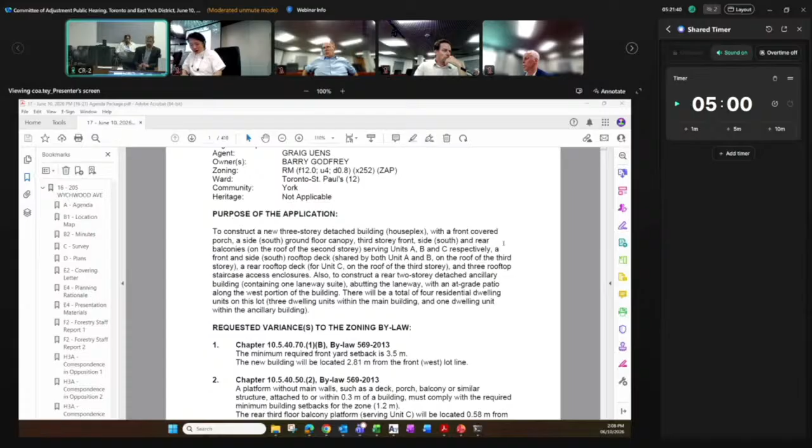Containing 1 laneway suite, abutting the laneway, with an at-grade patio along the west portion of the building. This will be a total of 4 residential dwelling units on this lot, 3 in the main building and 1 in the ancillary building.

We have received comment from Urban Forestry, and also we have received a list of oppositions.

203 and 207 Wychwood Avenue, and also 58, 62 Kenwood, and 200 Wychwood, and 201, 216 from Wychwood. And that's one without an address, Chan Cohen.

And we're ready for the agent, and I believe... Yes, Madam Chair, we have the agent here in person, and we have 5 speakers in opposition, in person as well as online. Okay, so you do have still 5 people who would like to speak to this application.

So please give us your name and address, and when you're ready, we'll get a presentation from you.

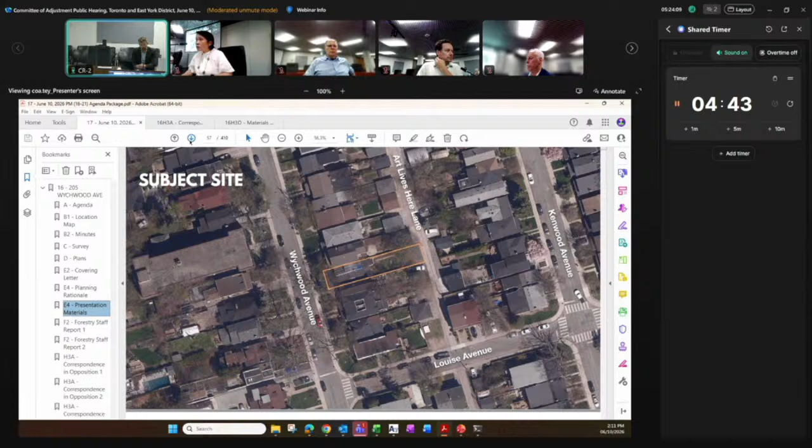Next slide, please. There's an existing 2-story, or 1.5 story, building on the site, as you can see there, the white building. The context includes a variety of residential buildings, 2 and 3 stories in height, as well as a 4-story apartment immediately across the street. There's a mix of modern and older styles, front and rear balconies at various levels, and other characteristics that reflect elements of our proposal.

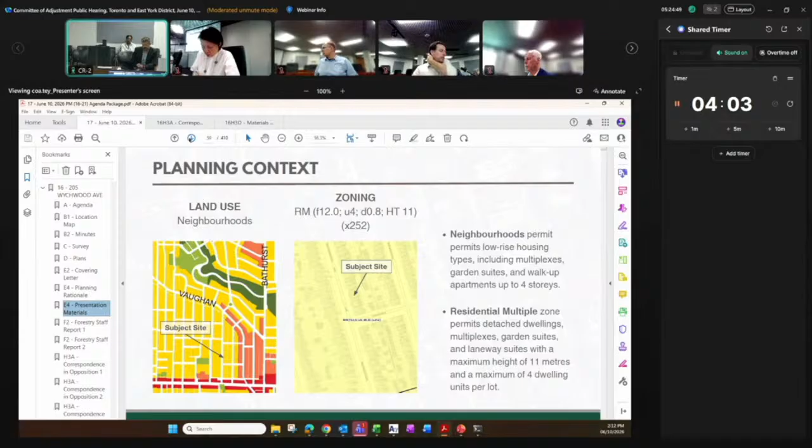Next slide, please. The site is designated neighborhoods, it's zoned RM. The planning framework permits a variety of low-rise housing forms, including multiplexes, low-rise apartments, as well as garden and laneway suites. Next slide, please. The proposal comprises a 3-story multiplex and a 2-story laneway suite.

As I mentioned, there are 4 dwelling units in total on the site, and 0 parking spaces proposed in accordance with the zoning requirements.

The one interesting thing I'll note about this proposal, as I noted when we deferred back in April, is that this is the result of 3 separate families getting together to purchase the property and develop a triplex for their 3 daughters, one of whom is here today. The daughters are friends, and they share a desire to live in this neighborhood, which I understand is a desirable neighborhood in the city. I think it's very much in the spirit of the intent of the EHON policy changes.

The application was deferred previously based on comments from neighboring properties, as well as for us to clarify one of the encroachment variances. We took that time since the deferral to have a virtual community meeting on April 23rd. About 10 residents were in attendance, mostly surrounding neighbors. There were questions and concerns about trees, setbacks, building height, among other things. We talked about the process as well.

It was a good meeting, and it helped inform a number of key changes we made, along with information from the letters we received. One of them, shown here, is that we've revised the south side yard setback from 0.06 meters to 1.2 meters at the ground floor, which is the compliant dimension, and the back portion highlighted there is 0.45 meters for floors 2 and 3.

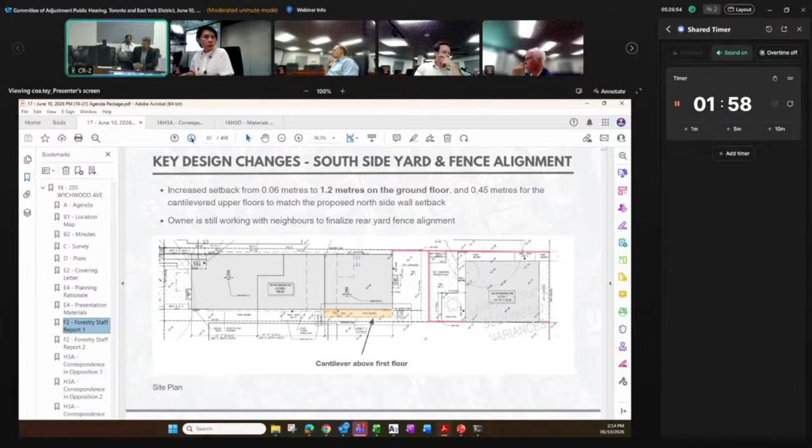We've reduced deck encroachments, one of them entirely. On the south, you can see in green that was reduced to comply with the bylaw, and the other one, to the extent of the side yard projection, we have screening shown on all balconies as well.

The roof deck areas have been decreased. They've all been set back from the main walls to prevent overlook and privacy issues. We added access from the middle unit to the roof deck, partially to offset the reduced balcony on the lower level.

These changes have removed 2 of the variances. We note that the area has been split, as you see here.

We've also reduced the massing of the staircases to as great a degree as possible. The left shows the previous design, the right shows how we've reduced them as small as possible while complying with the building code.

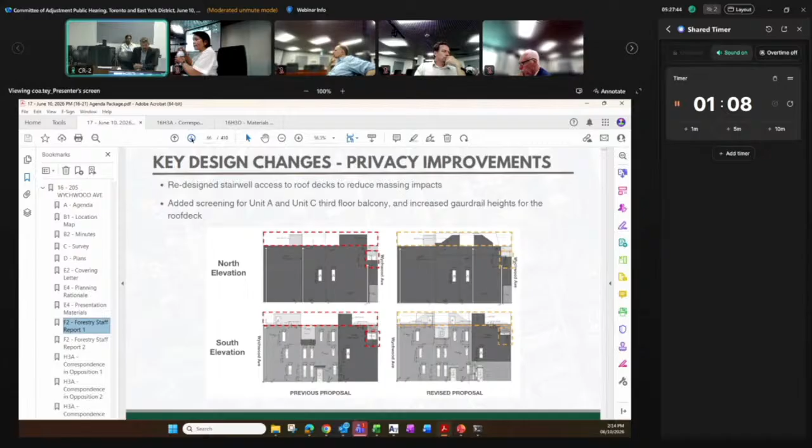Our front and side setback variances are shown next. These are the list of variances, including ones that have been removed.

The front setback is pulled back from the current front of the house. The north side setback is also greater than what currently exists. Though the building is taller than what currently exists, the height is permitted by the bylaw, and there are no primary windows facing north. The south setback broadly complies with the 1.2 meter requirement; only a portion of the second and third floors at the back of the site is set back 0.45 meters.

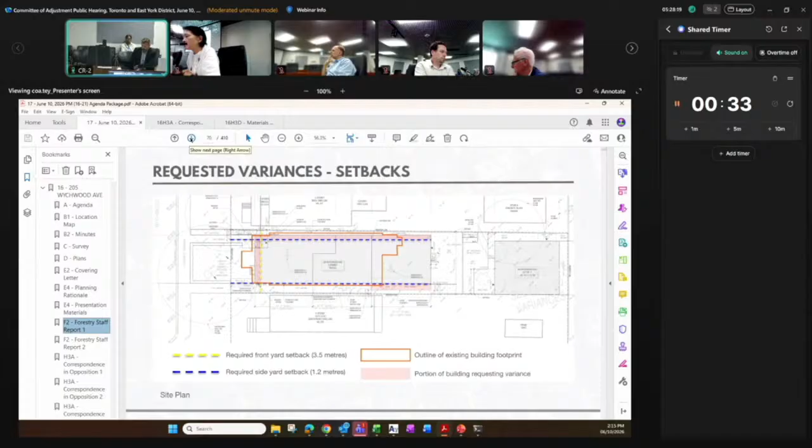The reason this part of the building is where it is, is to maximize the number of 2- and 3-bedroom suites in the unit. It's very much an end-user type building, consistent with multiplex policy 826 sub B2, which intends larger family-size units. We have no rear setback, laneway, separation distance, landscaping, or length variances associated with the building. No trees are being removed or injured as a result of either building. I'll note that the side yard setbacks align with context in accordance with the multiplex policies.

If I could ask for 1 minute to finish, I'm sorry—maybe half a minute.

Half a minute works. We've reduced the first and third floor balconies as shown on this slide, and we're showing screening on those balconies as well. The green areas are what the bylaw allows, the red areas are what projects.

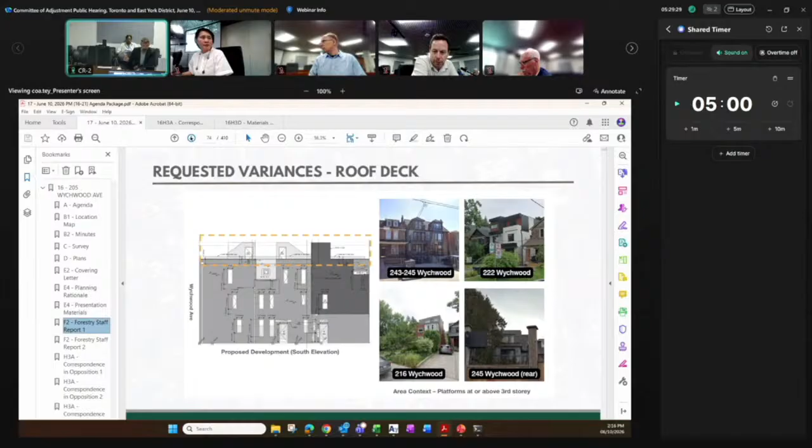Next slide, previous slide - you can see the roof areas have been reduced, and there's a characteristic of upper roof decks, including a 4-story building just to the south. You see at the top or bottom left there, which has a roof deck and a 4th story to access those.

In summary, the proposal before you reflects community and city staff input, which resulted in revisions that reduced and removed variances, improving the project so it fits better within context, especially regarding the front side yard setbacks, height, and landscaping. City staff do not object to the proposal. In my view, the changes materially address neighborhood concerns and meet the 4 tests.

Thank you. Is it, so we hold our questions to him? Can I ask a few questions of clarification? Just clarification, okay. All right, so let's go, yeah. So just—

I was just looking at the plans. It looks like the total height, including the staircases to the roof, is something like 12.49 meters. Normally 11 meters, I think you said, was the maximum. I was just wondering why that didn't need a variance. The stair enclosures are permitted projections under the bylaw. So the roof height, the height of the 3rd story complies, and the railings for the roof decks, which are all set back, and the stair accesses are permitted projections.

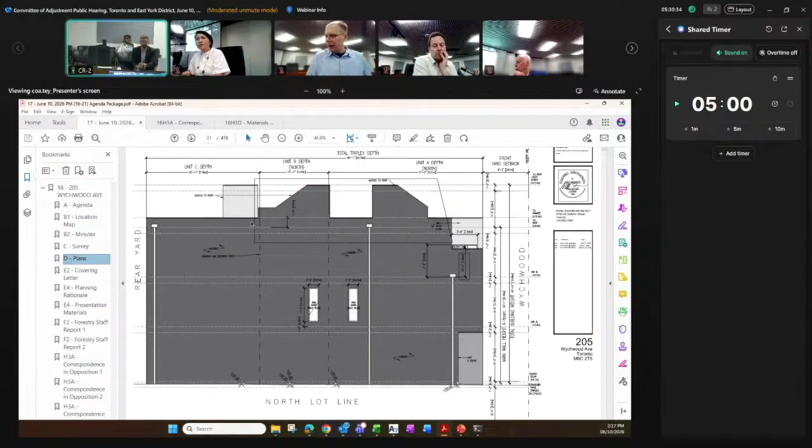Okay, great, thank you. And it looked like the length was 20.75 meters, which is also more than I think usually is allowed for multiplexes. I was just wondering if you could speak to that. That's correct, and that was flagged when we originally submitted back in March or February. This zone category does not have a length requirement for a multiplex building. Okay, great, thank you.

That's very helpful. One last thing - my understanding is the laneway suite is as of right, even though it goes right to the southern property line? Yes, we have a zoning review for the laneway suite. It's as of right. Laneway suites have a 0 side yard setback. Garden suites have a side setback, but laneway suites do not. That's correct. I think that's all helpful to clarify before we go into the details.

Thank you, that's very good, because I was wondering. I just want to mention that the presentation is really, really good. The written one - on page 2 of the cover letter, there's actually a chart showing the difference, the improvement since the last hearing. I find that very, very useful, because I was asking a whole bunch of questions before I discovered that. So if we want to refer to those changes, they're quite useful.

Any other clarification? Because we still have some questions, but I'm sure later we can ask. So we will listen to the oppositions now, and we'll bring you back later.

Madam Chair, now we'll hear from the owner of 203 Wychwood Avenue here in person. Good afternoon, committee members and attendees. I'm Melinda Benjamin, from 203 Wychwood Avenue. Please accept my gratitude for the opportunity to express my objection to the proposal as it stands.

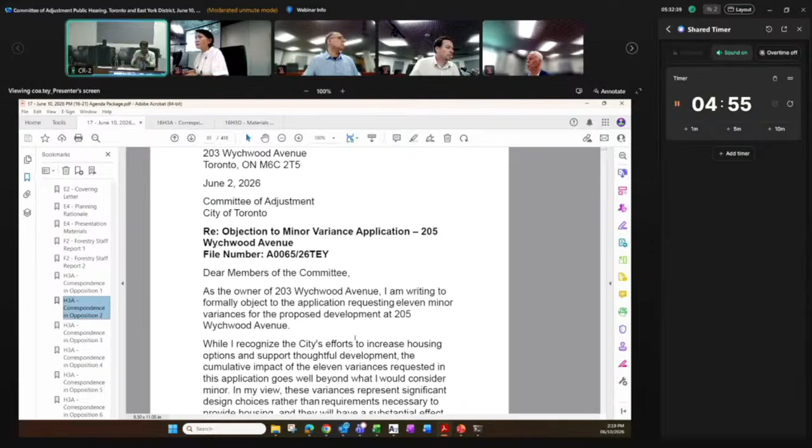Like many homeowners, my home is my biggest investment. I started from the bottom and now I'm here. I object to having a structure 17 inches from my property line, variance 9, towering over with a view into my third bedroom skylight, with windows emitting light at night through that skylight. The bylaw requires 1.2 meters.

I object to the idea that we should compare how close houses in the neighborhood are and how they were built 20, 30, 50 plus years ago, before this proposal, to justify approval of not complying to current bylaw standards. I urge the committee to hold the new building to comply with all the applicable bylaws.

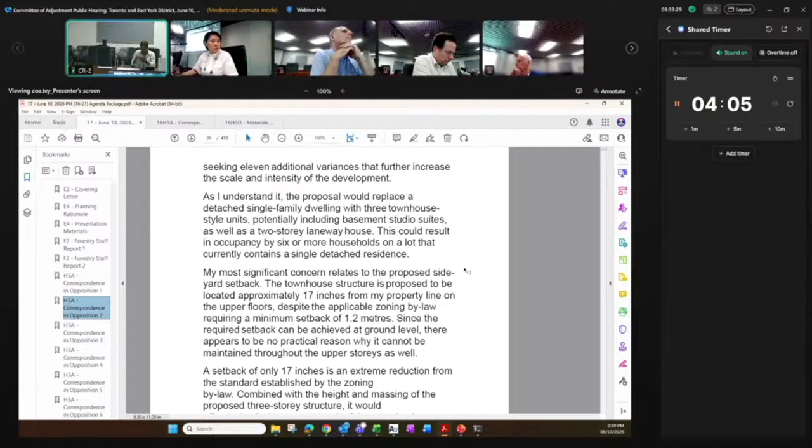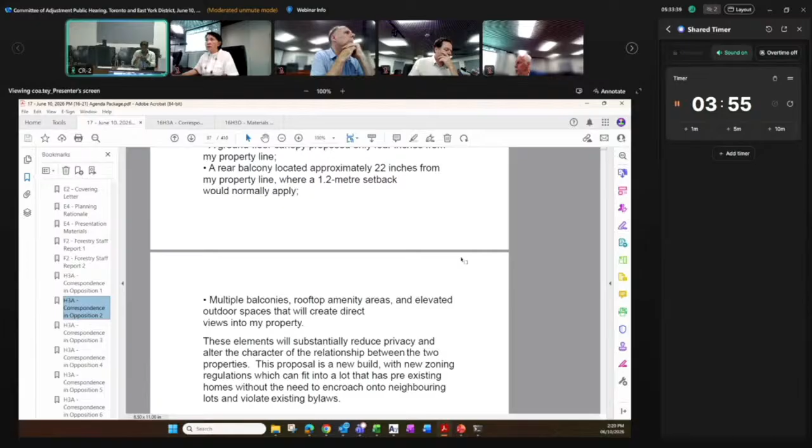My lot is 17 feet wide. The width of the proposed site is 25 feet, 8 feet wider than my lot. 8 feet is just short of half of my lot. These minor variances are not minor to me, when inches will cost me to spend more in getting workers to work in tighter, smaller spaces, not having canopies and balconies to work around.

A canopy will be located 4 inches from the lot line. The bylaw requires 1.14 meters, variance 7. This proposal is for a new building, replacing a pre-existing non-conforming house, and cannot be compared to those setbacks from 100 years ago.

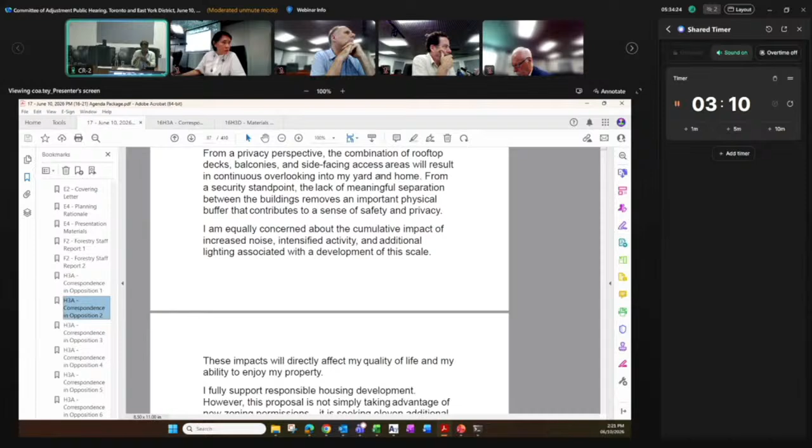A 1.2 meter setback for a new build is possible. It's obtainable on a 25-foot lot. I object to having a laneway house built right on my property line with no setback.

Dialogue is essential. However, I object to Barry Godfrey coming to my house unannounced at night on May 4th, stating that my house A is on his property line, and B, that he could build a fence between the houses, cutting off access to the north side.

On December 9th, there was a hose attached to 205 Wychwood that burst. At 10 p.m., I had to go out there and shut off the water because I had access to the north side. I object to any design that causes unnecessary encroachment, deprives me of privacy, a sense of security, and enjoyment of my home. These choices are not necessary to build affordable housing on a 25-foot lot.

I know because my husband and I built an affordable house on a 17-foot lot. As a widow of 2 years and a retiree on a fixed income, I object to any proposal that would make the cost of repairing my home higher.

In particular, I'm concerned about the paved walkway between the buildings. The water is going to flow right against my house. I object that a picture of my vehicle on my private lot is used in a presentation that's posted online. I know that's not illegal, but it would have been very respectful to ask me if a picture of a vehicle on my lot would be part of a presentation.

As many of us know, home ownership is difficult, and keeping it is proving to be just as difficult. We're learning now how the new zoning regulations may impact our homes. The Ben Mulroney Show had a very informative segment about 63 Station Road. I would like my family to have the ability to adapt to the new zoning regulations without impediments. Please reject this proposal as it is.

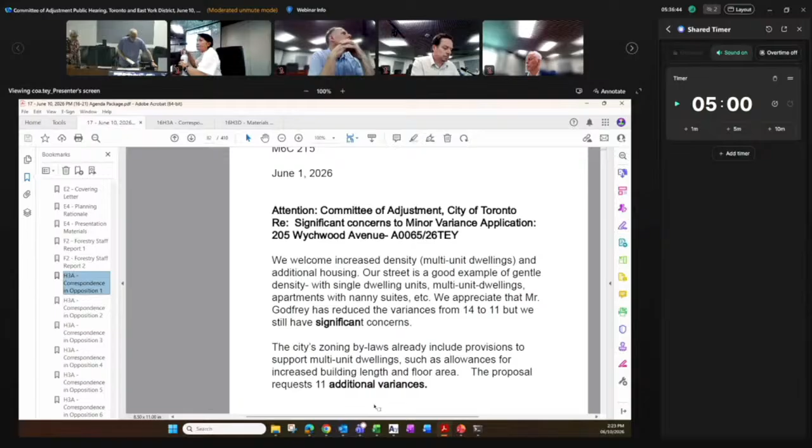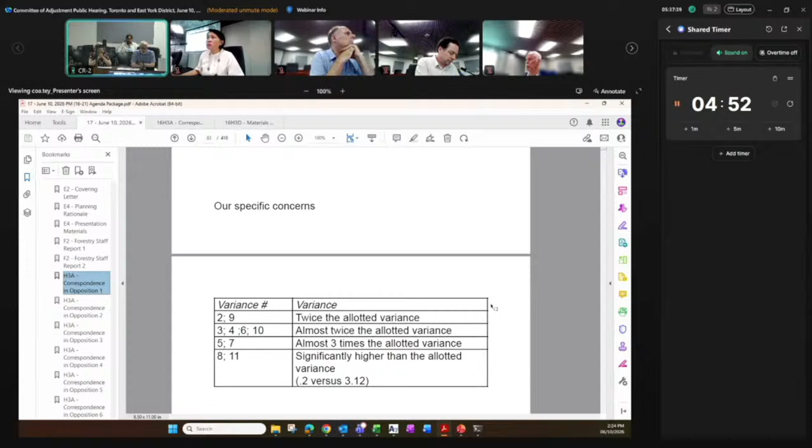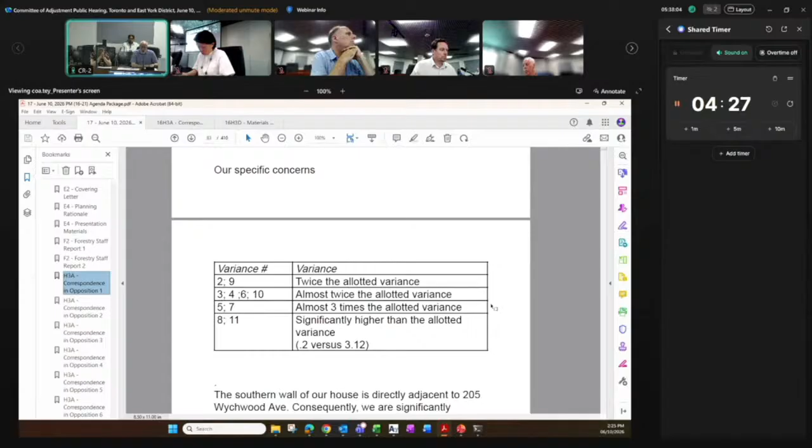That's sure, yeah. So I'm Alan Silverman, my wife Yvette Mathias. We're at 207 Wychwood. We are directly adjacent on the north side to the proposed development, so obviously this concerns us greatly. I want to begin by saying that we support 100% what has just been expressed by Ms. Benjamin at 203 Wychwood. We are not opposed to development, and we appreciate gentle density, which is the common situation on Wychwood at the present time. And even though the number of variances has been reduced from 14 to 11, we still have significant concerns.

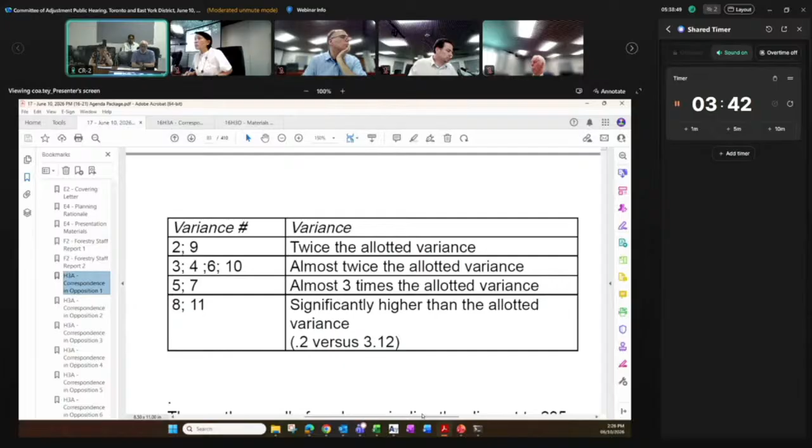So let me begin by saying why we consider it to be significant. On variance number 2 and 9, this is twice what is allowed by the bylaw. In 3, 4, 6, and 10, almost twice what is allowed by the bylaw. In numbers 5 and 7, almost 3 times what is allowed by the bylaw. And numbers 8 and 11, significantly higher than allotted by the bylaw, from 0.2 to 3.12. So this is significant, not minor.

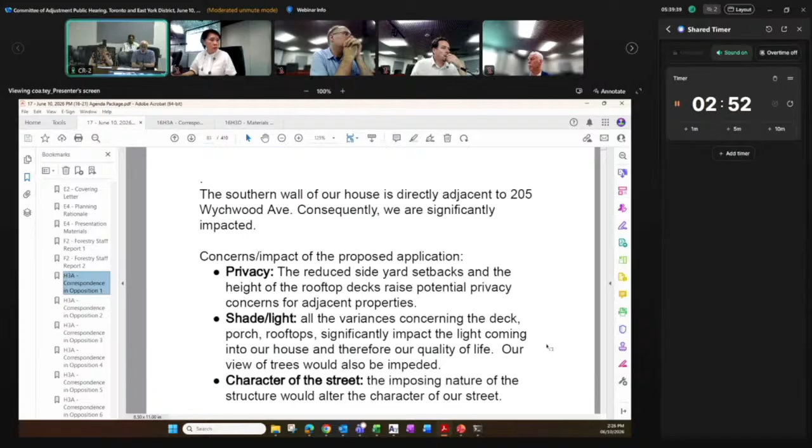To summarize what this means for us: first, because it is much bigger, larger, higher than, and closer to us than what is required, that raises the issue of privacy. Secondly, for the same reasons, it has a huge impact on the light in our building. We now have wonderful views, both east and south, and this will be severely affected by these proposed changes. And finally, the character of the street. I think Ms. Benjamin has clearly pointed out that this is uncharacteristic of the street.

I just wanted to comment on something that was said by the proponent at the beginning. We welcome family members of the owners, and we are very friendly neighbors, but that issue is not relevant to the discussion at hand. They refer to key changes that they have made from 14 to 11. I think I have clearly pointed out these are not key changes, they are minor changes, but the overall impact is significant and major.

Secondly, there was reference that no trees would be injured. Well, right now, it would be impossible to build the 2-story laneway house without significantly cutting down several of the major branches of this tree. So therefore, dear committee members, thank you for listening, and we are in opposition to this proposal.

Okay, 30 seconds. Yeah, you still have some time, 1.5, yeah.

I just wanted to add, we have windows facing the south, double windows, and double windows facing the east. Right now, we get tremendous light coming through those windows, and we get a view of trees. With the extension in the back and exceeding the variance, we will be looking at a building instead of the trees. And our garden is something we take great pride in. Instead of being able to see other gardens, it'll be impacted by having a big building in the back beyond what is allowed in the bylaws. So I just wanted to add, it has a very direct impact.

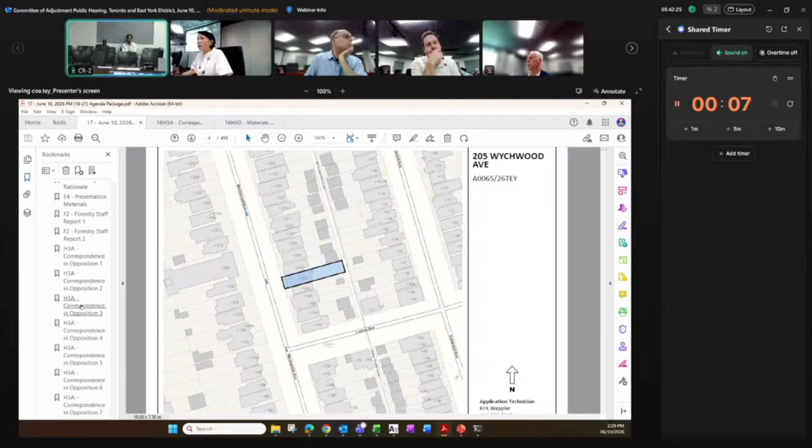Hi, everyone. My name is Chen Cohen. I live at 196 Wychwood Avenue, directly across the street from the 205 Wychwood development. And today I'm speaking in opposition to this minor variance application. Firstly, I want to apologize to the members of the committee for not submitting a formal letter. Can you hear me? Yes, sorry, I just want to make sure the clock starts. Okay, perfect. So firstly, I want to apologize for not submitting a letter in advance of today. I was traveling for work and unfortunately missed the deadline.

By way of context, I'm a partner at a prominent architecture and design practice. And although I'm fairly new to this street and neighborhood, I have taken the time over the past several weeks to carefully review the application materials, including the latest planning rationale submitted on May 29. In speaking with neighbors about this application, it became very clear to me that many people are concerned and do not necessarily have the background or skill set to read architectural drawings to fully understand the scale of what is being proposed.

That's why I submitted, if you could go to the late material submission, a sketch simply showing the elevational change between the neighbors at 205 and 203, showing the relative change between this development. The comparison is important, even with the roof access areas pushed back from the front, and even with the sloped roof line that appears intended to reduce the perceived height. The proposed building remains significantly taller than its immediate context, as shown in the sketch. Compared to 203 Wychwood, the proposed development represents approximately a 47% increase in height. And in my view, that's not minor. It clearly illustrates how oversized this proposal is for the site and for this part of Wychwood.

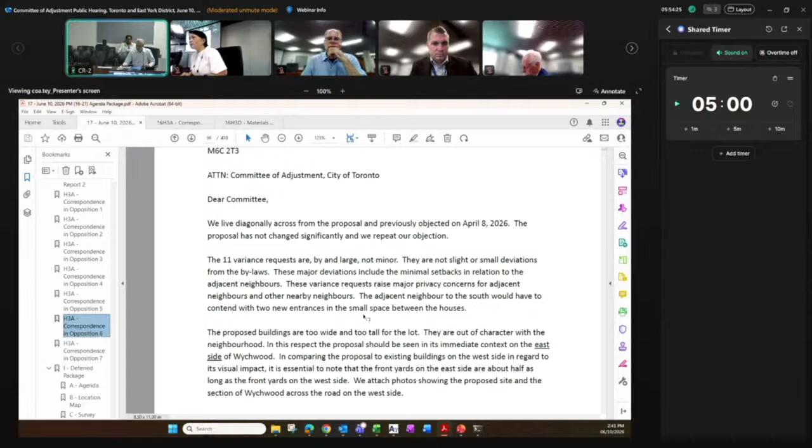Hi, welcome, thank you. First, can you put up the location map on the screen? Oh good, thanks. Okay, my name is David Lampert, and Mimi Beck and I live at 200 Wychwood, and I'm speaking on behalf of both of us. Our house is diagonally across from the property that the application is being made for, diagonally across from 205.

We believe the house is simply too big for the space allotted for it. You've heard the other speakers who are objecting, and we support everything they're saying. Eleven variances sounds like a lot of variances to us. We haven't been before this committee before, we don't know exactly how it operates, we're new to this. But when we hear that the applicants are requesting 11 variances, I think that's a strong signal that this is a very complex project.

When we look at it in detail, at the setbacks in various ways—the front, the side, the laneway house, the roof decks, the balconies, the canopies—it pushes out in every direction. That's why the applicants are requesting so many variances, and I think that's a signal that it is too big, too complicated, that it pushes out too far. What I wanted to put on the screen, the location map, is to ask the committee to focus.

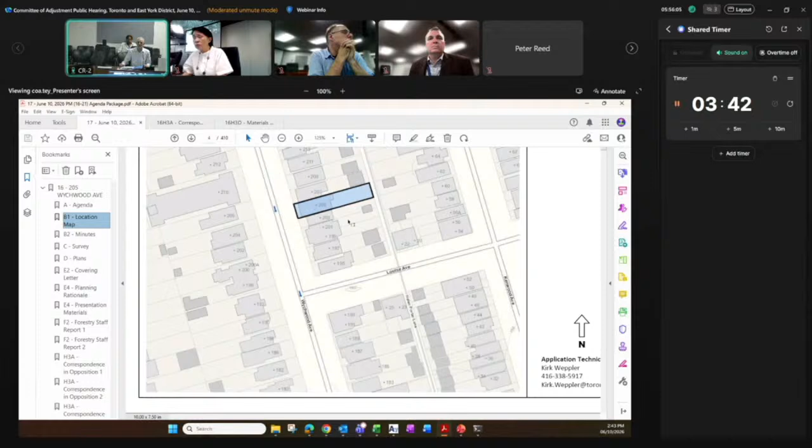The applicants have talked about the context, and other people have too. But a key point here is that the application should be seen in the very specific context of where the house is going to be located, which is on the east side of Wychwood. There's a fundamental difference between the east side and the west side of that block. On the west side, as you'll see from the location map, the front setbacks are substantially larger, roughly twice as large as the setbacks on the east side. And as I think Chen Cohn pointed out, on the west side you do have driveways.

She's talked about distinguishing this from 216 Wychwood, but I would say it's important to note there's a lot more space on the west side than the east side. Not just the length of the front setbacks and front yards, but also the number of driveways all the way up the block on the west side. The east side houses are much more tightly compressed and there are no driveways. So it seems like this is a large house being wedged into a small space.

Even without any variances, it would feel and look like a large house. But with all the variances, or any number of the 11, it's going to be that much more intrusive. What it does is crowd the adjacent neighbors. It wants more amenities for the people who will live there, but at the expense of the adjacent neighbors. We simply feel that's just not right and not appropriate.

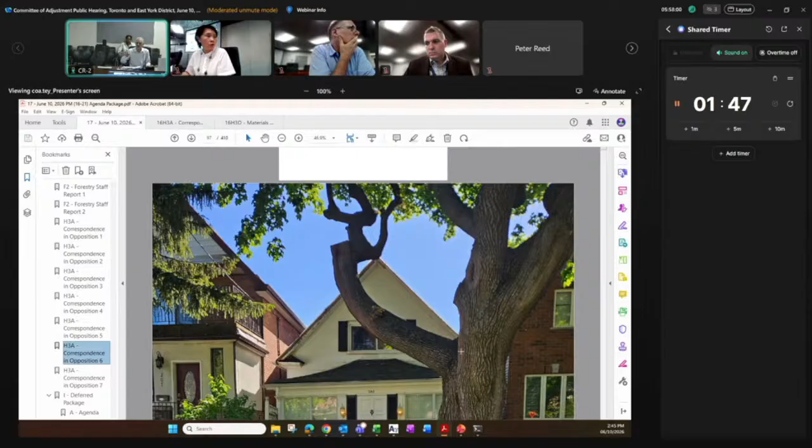Again, repeating what Chen Cohn said about it not being appropriate to compare this house and the narrow spaces on the west side houses with the narrow space this house would create between it and its neighbors. Those houses, many on the west side and even on the street, were built before the bylaw was in effect. We feel very strongly that the bylaw has to be taken seriously. Of course, it is your job, that's why you're here, to allow variances which are minor, but overall to give the bylaw the respect it deserves.

Just to bring out one example, one of the panel members pointed out there's a new provincial regulation that says instead of 1.2 being the minimum required, it's 1.05. But for the side setbacks on either side, especially the north side, it's for the whole house; on the south side, it's for the top two floors. So instead of 1.05 meters, it would be 0.45 meters. So even with the new requirement, that's 50% less than what's required under the bylaw, and it leaves the adjoining neighbors with very little space.

As others have mentioned, doing maintenance is a concern. We live in one of the houses featured in the applicants' presentation, and we have a narrow space and an older house, but it's difficult to do maintenance with such a narrow setback. So I'm asking or urging the committee, why create such a problem that the bylaw was meant to remedy? That's why the bylaw requires the setbacks, to have respect and consideration for the neighbors, and this application would undercut that essentially completely. That's why we oppose it.

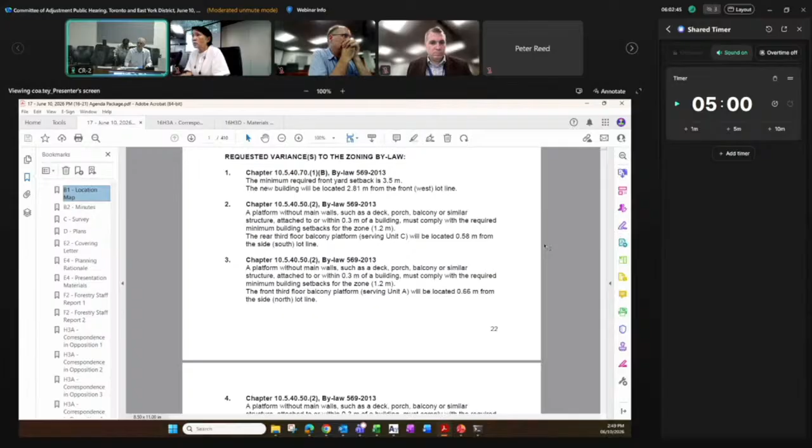I wish I had more time to study it and answer. I can tell you about the process - you do this all the time, right? But for us as outsiders, to pick our way through each of these variances and say what does this one mean, what does that one mean - it could be done a lot more clearly and simply, but you probably don't want to hear that from me since you hear it from a lot of other people often. So I'll leave today regretting I didn't give you a better answer. No, great answer, I appreciate that.

Last comment or question from me. When you talk about the number of variances - I know that's something those in opposition have raised - and the quantification, how much of a degree of difference each variance might entail. Now I know you won't know this, but I'll raise it anyway. We appreciate that most people who come before us are lay individuals, so we appreciate them coming here and giving their input. The courts have determined, case law has basically determined, that when it comes to the test of minor, it's not just how many variances and the quantity within each variance, the difference in the numbers - it really comes down to impact. Can you speak about what you think the impact of this would be on you and your property?

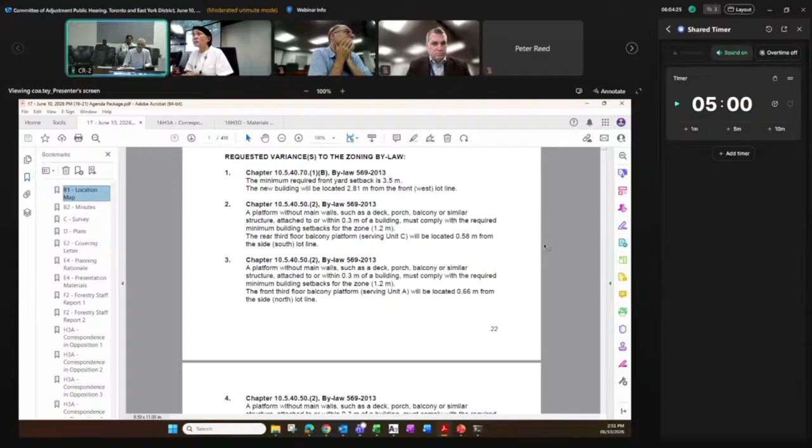Well, I think I should answer your question and talk about the impact on our property. It's not - a lot of it is a visual thing. I'd say that's the way the neighborhood is going, and on the east side it's going to really jump out, it's going to look jarring. And it probably sets a precedent for others - somebody else buys a house and knocks it down and builds something similar, and it changes the nature of the block, what it looks like.

I don't know if I'm trying to do something deceptive here, but we know our neighbors - Melinda Benjamin, and Alan and Yvette, Alan Silverman and Yvette Matjes - and we feel for them. We think it's very unfair that, as other people before you said, the city has relaxed conditions and made it possible, a much more liberal environment to build multiplexes. Both of these people said, okay, we're not opposed to multiplexes, but why does it have to be like this at our expense? It's perfectly possible, as Ching Kong mentioned, to build a multiplex without any variances, do it. And you might even do more with basement kitchens too, which I think the people beside them couldn't stop.

Okay, you answered the question already. Yeah, thank you. Yes, thanks very much. Appreciate it. Any other questions?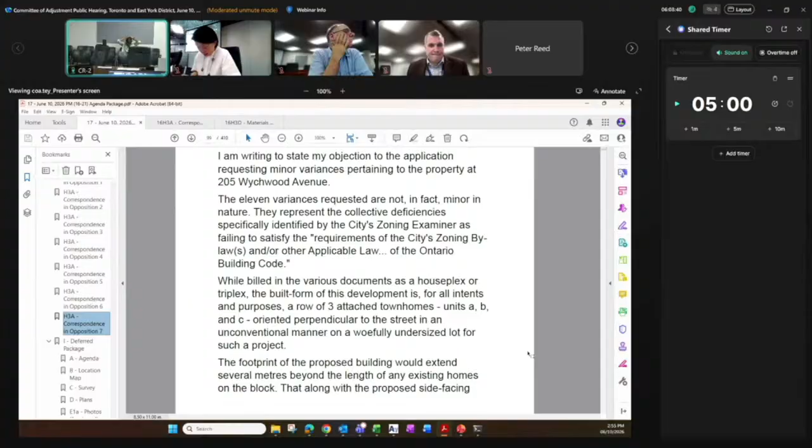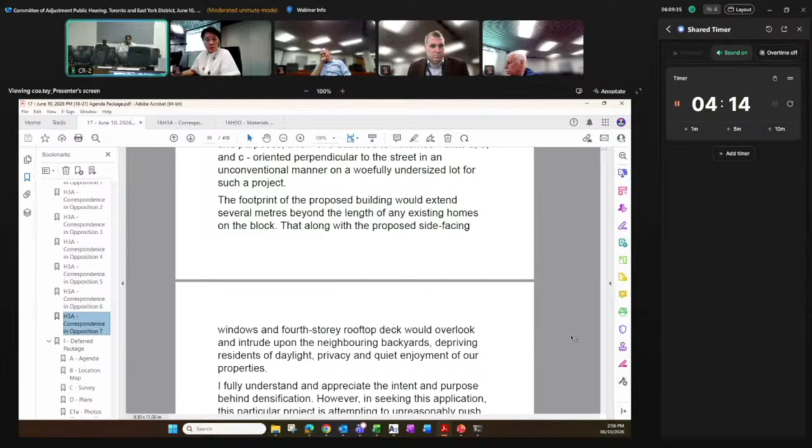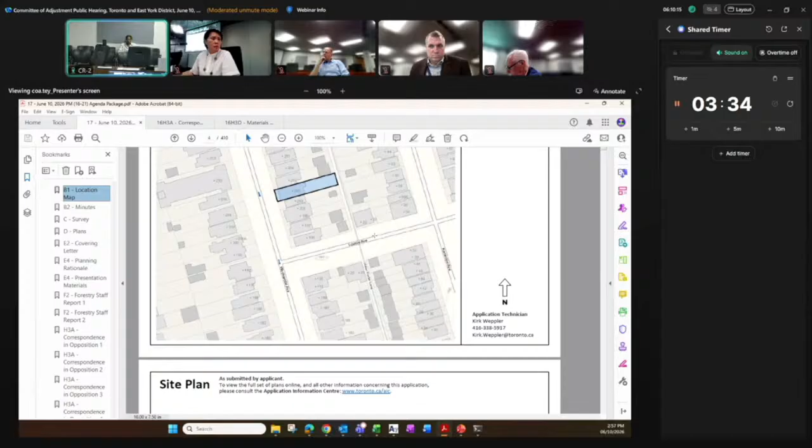I'm a concerned neighbor who would be adversely impacted primarily by the excessive length and height of the proposed building and the consequent overlook and lack of privacy. However, I am also concerned that this application raises more questions than it answers and appears to suggest a lack of transparency. While calling the building a houseplex, the submitted drawings appear to depict a row of 3 attached 3-story townhomes that are not facing the street. Yet the zoning review being pursued is that of a triplex, with 11 so-called minor variances for your consideration today, specifically the ones identified by the zoning examiner as failing to satisfy those requirements. In addition, although the plan clearly indicates that the building length, height, and density exceed what is permitted, no requests for variances for those parameters have been included in this application. And I heard that question being raised just a few minutes ago. Why is that not included? Overall, I agree with the opinions expressed by others that the collective variances are not minor in nature and that this proposal represents an attempt to shoehorn an inappropriately oversized development onto a lot unsuitable for that purpose and not in keeping with the character of the existing neighborhood. I respectfully request that you deny this application.

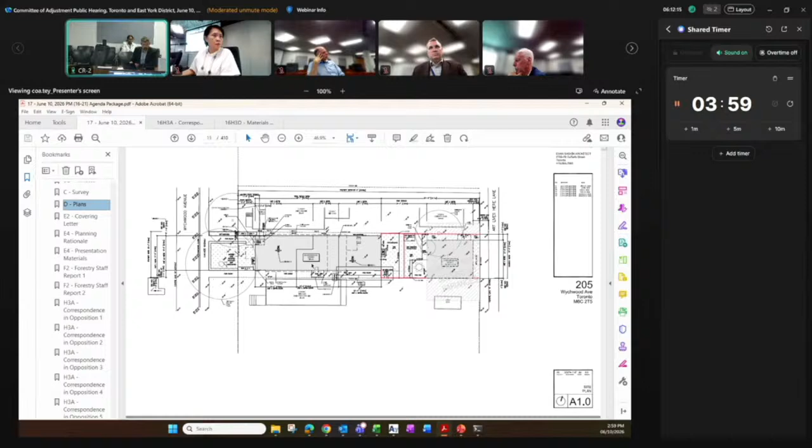So to get to the matters that were raised to the north, regarding the setback, we pulled the building north setback from its current location. It's set back more. I note that an as-of-right condition is also very similar - a building with the same length, height, and basically setbacks can be built here today. There are no length or height variances. So in terms of the wall facing north, it's very similar. The associated impacts of the variances requested are effectively the same as an as-of-right development. But in consultation with the neighbors to the north, we're making sure not to put a fence there, and making sure not to position windows to face into their existing south-facing windows. That was a deliberate change we made. The laneway suite is set back on the north side, I'll note, and the architect is working with urban forestry staff to ensure that the footing and foundation and approach to construction are not impactful to the tree as part of the permit that's required in forestry's condition.

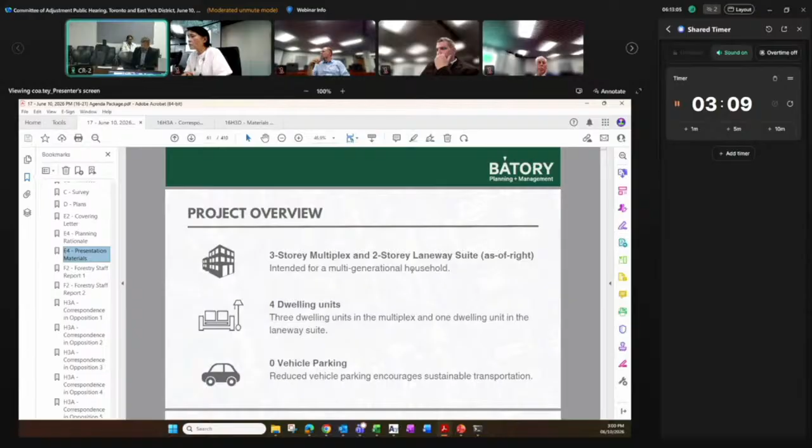To the south, the majority of the setback meets the 1.2 meters in the bylaw. We look closely at the side yard context in the area. If staff can pull up slide 16 from my presentation, the geographic neighborhood context is characterized very much by narrow side yard conditions. You can see that in the mapping, and in a number of the images we've shown. This is in accordance with official plan policies which intend that new development reflect the prevailing characteristics of the building.

Regarding privacy, the owner has advised that to the north, they're rebuilding a fence, but not doing so in a way that would impede access currently enjoyed to the north.

201 Wychwood made a comment about lack of transparency. I think we've actually gone to great lengths to communicate here. Perhaps my client knocked on doors too often, as was noted by one of the commenters. We had our community meeting, and we've had subsequent conversations. As I said, it's been helpful.

The basement kitchens - the proposal is to create a 3-story triplex. The units are proposed to be divided via condominium, so each unit is proposed to be divided and separately conveyed. That's the plan. My understanding, having talked to my client about this - I messaged them during the speech from the neighbors - is that 2 of the families want to ensure there's opportunities for multi-generational living, aging parents potentially to live in the basement, or them to live in the basement.

The layouts don't suggest that these are separate units. While a 6-plex is permitted, that's not what we're proposing. That's subject to some different criteria, and it wasn't reviewed by the building department as that. If that's a concern, I'm happy to talk about ways we could rectify those concerns.

Regarding height, I have concerns about the elevations shown by one of the speakers because they don't show the reality of the structure when viewed from the street. Looking at elevations is not a helpful way to view the perspective of a building once it's built, especially when the 4th level on this building, which isn't a story - it's the pop-ups that are set back and sloped - won't really be visible from a number of places on the street. In other places they will be, but the front-on elevation is not an accurate representation. Also, the structure doesn't exceed the permitted height.

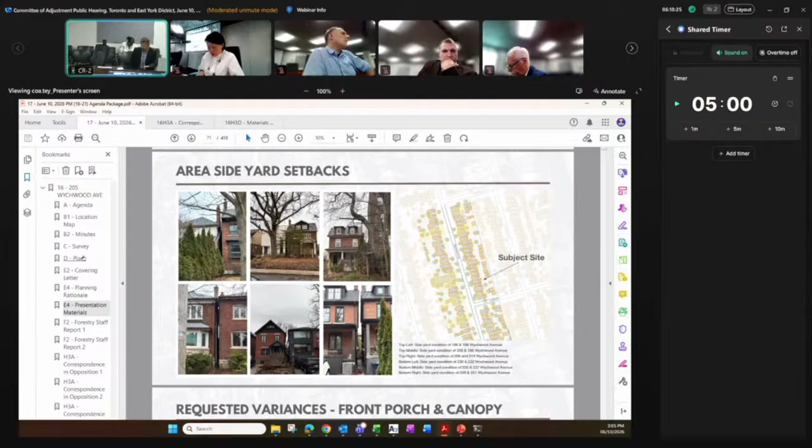So we're providing the setbacks and planters. If screens are requested to the north and south, if that's something you feel is appropriate, I would not object to that condition either.

Okay, but so at the moment you're just proposing guardrails, it wouldn't be as high as a full privacy screen. A privacy screen would be 1.8 meters. 1.5, no, usually 1.5. But that's my question too — what's your proposal for that? Is it guardrails that are like 1 meter or something?

Code compliant guardrails, let me look at the elevations here. 3.6, I mean like 3 feet 6. 3 feet, so like a meter. They're 0.9, 3 feet, so twice the height of that would be the roof screening to the south and north. I don't really know if the neighbors are more concerned about massing or privacy, so maybe that's something you can talk to them about.

Would you be open to working with them on their preference? We would absolutely be. I think one of the reasons my client went around and talked to people to the degree he did is because his daughter is going to live in the building and they want to be good neighbors. So we're happy to have those conversations.

Okay, great. So I want to talk about the side yard setbacks, which are clearly one of the big concerns. On the north side, you're proposing 0.45 meters, which is slightly better than the current, although of course your building will be higher, so it'll still have some impact.

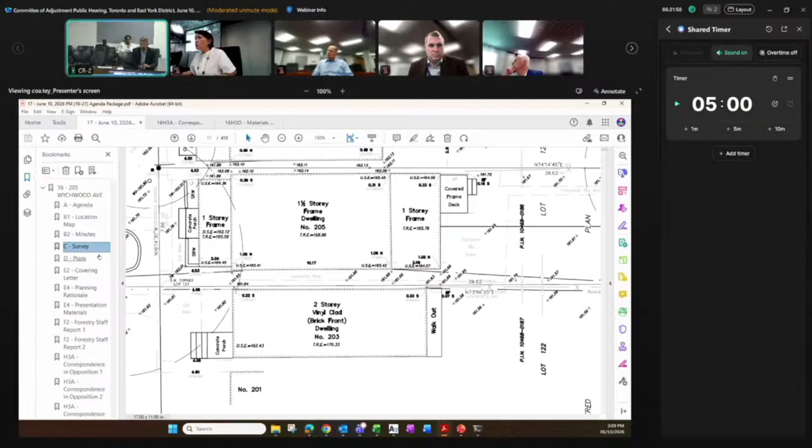Just regarding the rooftop patios, I'm not commenting on them. My question is because one of the deputants mentioned that those stick-out enclosures are not considered allowable heights if they lead to a habitable space. I want clarification, only because to avoid extra variance. But when you presented to us, you said all three enclosures are exempted from the height calculation. So who's right?

Certainly, Madam Chair, it's an important clarification and goes to the fact that a lot of these variances are technical. The stairwells, as proposed, are stair accesses to the roof and the enclosure of those stair accesses, so under the bylaw they're permitted projections above the height.

If it was habitable space -- and the reason I note the example at 216 is because it was subject to variances and went to the T-LAB as well. It's a 4-story building, and the 4th story is the deck access. We could have eliminated the variances for these stair accesses if we had a fourth story with habitable space that accessed the deck areas. We elected not to do that because that structure would invariably be larger than the stairwells. Sorry, I want to correct myself -- not habitable.

I mean, I think she said occupiable. Yeah, occupied space, that means a deck. If it's just plainly roof, then those things are exempted. So your clarification is very good, because that's what I thought -- you might miss some kind of variances.

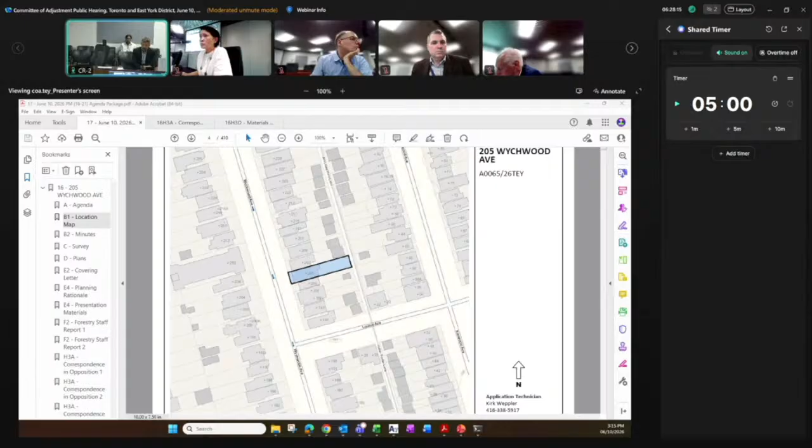Yes, it's taller, but again, that's as of right. And then to the south, we meet the setback in most cases, except for a portion of the second and third story toward the rear of the site.

And so my perspective on this is, on balance, when I'm looking at the policies of the multiplex site and area specific policy, which intend - this is 826B2, Roman 2 - to encourage larger units.

When I pushed the architect on this to say, can you make the south side yard comply entirely? The response was, we're going to lose one of the bedrooms, and it makes the stairs challenging as well. And I said, okay, how far can you push it?

And so when we went to 0.45 meters for that section, it was for a few reasons. One, to reflect the prevailing characteristic, which you can see on the map that's up on the screen now - that of narrow side yards. If I were to define this street a number of ways, that would be one of the principal characteristics.

And so all of that on balance - the objectives of the plan, the comments we heard from the neighbors, which I think are important, and we have tried to address them in numerous ways - to me, in that there isn't an actual density number that is prescribed, we have to look at the form-based considerations, the context, the existing structure, and the policy objectives. And I feel that on balance, the proposal reflects those.

So excluding the basement, all these 3 units are 3-bedroom units, right? Yes, I believe one was changed to a 2-bedroom after. Let me look at the plans again. I just want to know the sort of breakdown - they're all multi-bedroom units, that's good, more for family or small family. The middle one is 2 and the other two are 3. Okay, and in terms of impact, you haven't gotten to that, but that's fine.

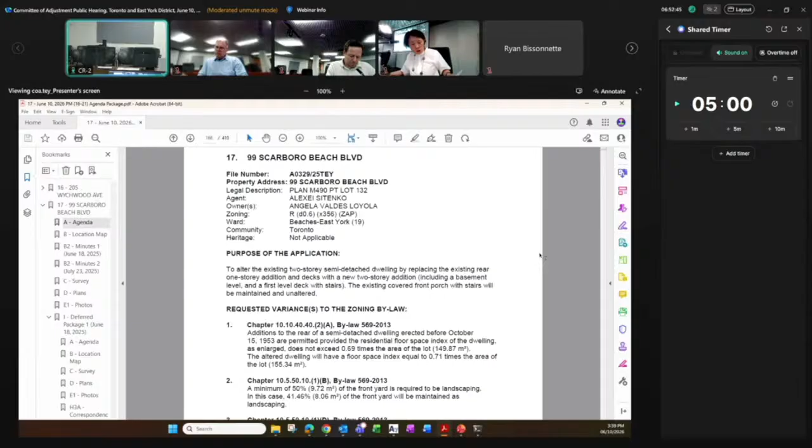We resume. Item 17 is 99 Scarboro Beach Boulevard. This is to alter the existing two-story semi-detached by replacing the existing rear one-story addition and decks with a new two-story addition, including a basement and a first-level deck with stairs. The existing covered porch with stairs will be maintained and unaltered. We've received copies of the minutes from June 18, 2025 and July 23, 2025 hearings, a survey, revised site plan, floor plan elevations, and three photographs. I believe we've received three oppositions on this file.

They're seeking four variances. Through you Madam Chair, we have the agent online and no registered speakers for this item. Okay, let's have the agent.

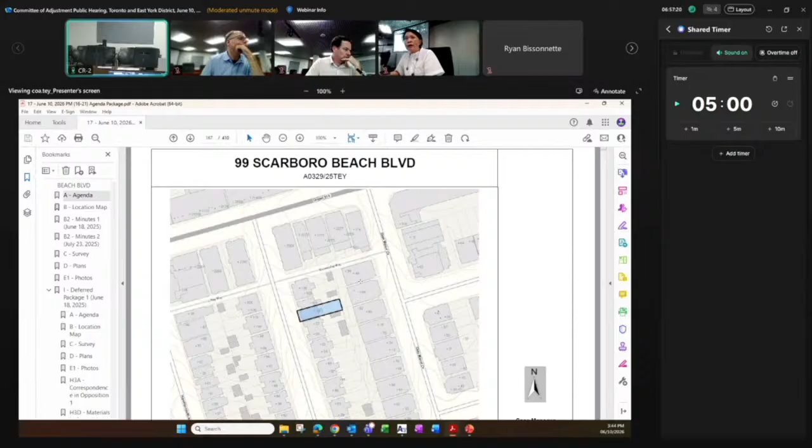Thank you. Okay, all right, so we are in committee now, or you can still ask questions if you have one. Okay, now we're in committee. I'm happy to put the motion forward, Ryan.

To approve the variances, I see four here. I don't believe there are any conditions, so approve the four variances, no conditions. Peter? Okay, sure. Second. All in favor, yes. It's approved unanimously.

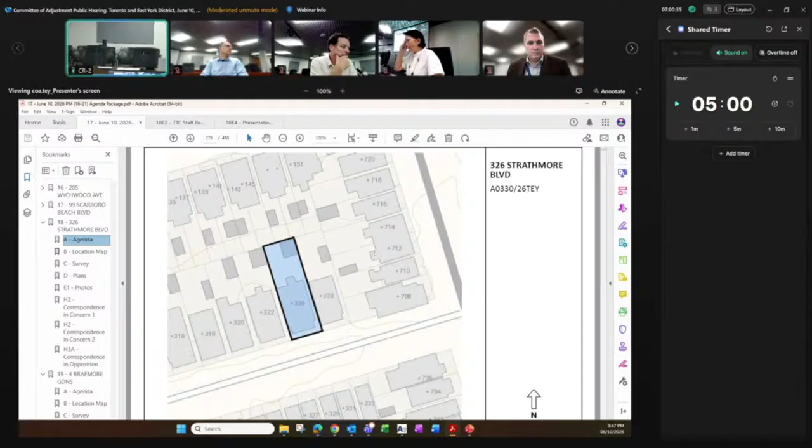You do have some people who would like to speak in opposition to your application, so you're required to give us a 5 minute presentation. Do you have a presentation you want to bring up on the screen first? Sure, it's just going to be the plans. Let's bring up his plans.

Essentially we're proposing a garden home that is intended to house the owner's growing family. In terms of the zoning aspects, we have complied with pretty much everything except for the setbacks. There are 2 items that we are before the committee in order to resolve, resulting from the separation between the main wall of the home itself and the garden home.

If you enlarge the site plan, you can see that the rear main wall of the home itself is actually 8 meters away from the garden home, which complies with the requirements. But there is an enclosed walkout at the back, and the zoning examiner is measuring the separation between the home and the garden unit from that enclosed walkout wall. That is giving rise to the 2 variances that we are seeking.

The homeowner is looking to maintain that enclosed walkout because it provides weatherproofing during winter season. We have also consulted with community planning, and they're satisfied with the proposal. We've worked with the designer and gotten rid of some of the windows on the rear main wall of the garden suite, so there are no privacy concerns for the neighbors backing onto the garden unit.

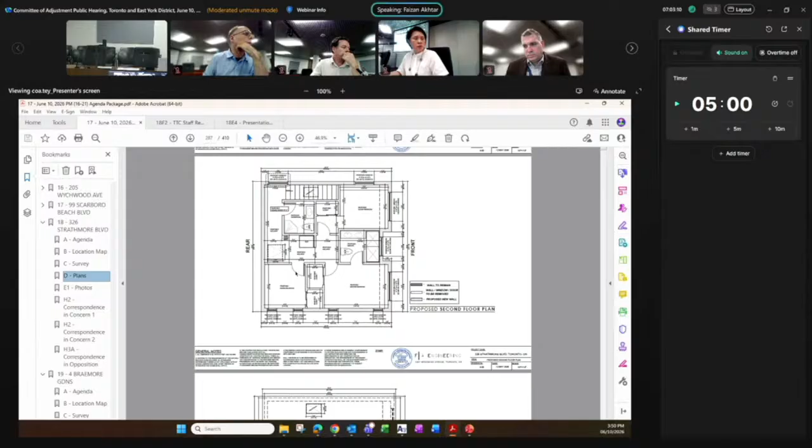Sorry, I just want to ask a question. Did you say you made some changes in terms of the windows? What were you saying about the windows? We worked with the designer, and we removed windows that were on the second floor rear yard. There were 2 windows that were there initially that we had removed.

But on which walls? On the rear wall. On the second floor? On the second floor, I think this is the second floor plan, right? So initially, on the screen, the plans we see have those removed already. Yeah, they've already been removed.

Okay, thanks, I just wanted to clarify that. Please, you have a question? Do we have opposition? Yeah, we have two people who want to. I just asked for clarification. Oh yeah, clarification is fine.

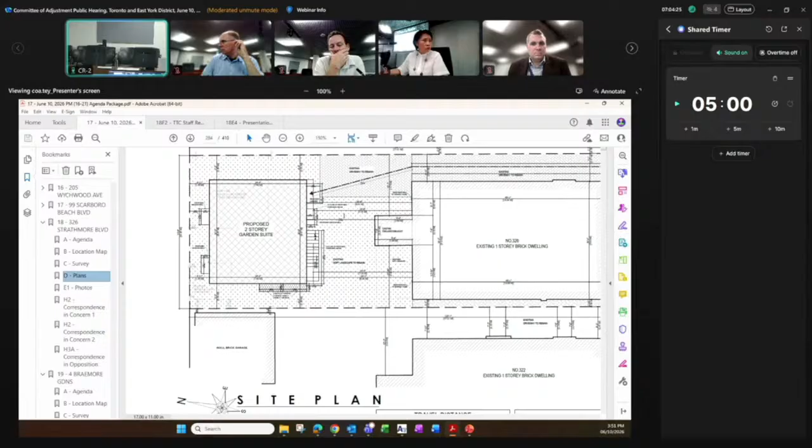If staff can put up the site plan again, which we just had on the screen. Right there, thank you. So to the applicant, I'm looking at the drawing, and both variances talk about a 5.2 meter separation distance, and I'm looking at the separation distance on the site plan, and you have a number of measurements between the rear of the main house and the front of the proposed garden suite.

So you have 8.01 meters from the rear wall of the main house to the proposed landing, is that correct? Yeah, to the rear main wall, from the rear main wall of the main home to the front main wall of the garden suite. Okay, so that's that one. Then the next one below is 7.52 meters, and that's from the rear wall of the home to the overhang above. Correct.

Then in very small text, I believe that's the variance, 5.19 meters. That's measured from where to where? From the enclosed walkout to the main wall of the garden home. And that's where the separation distance variances come into play.

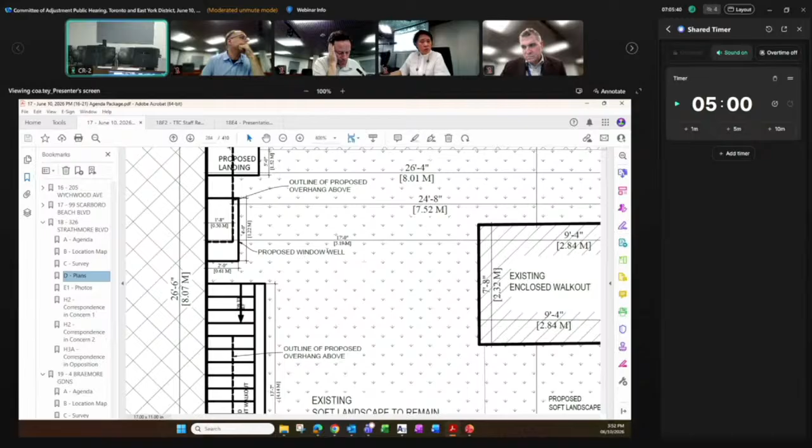Then below that you have another measurement, 7.55, that's outlining the proposed overhang above to the rear of the wall of the main home. And then you have 8.07 meters, which is from the rear wall of the main home to where?

To the actual between the two main walls, right? Okay, all right.

I'll give you a recommendation. When you have those kinds of measurements, it's wise to have an X where the line ends so that we know where it's being measured from and to. Perfect, I'll redesign it. Okay, thank you.

So we wait, will you have more questions? We can do it after we hear the two other oppositions.

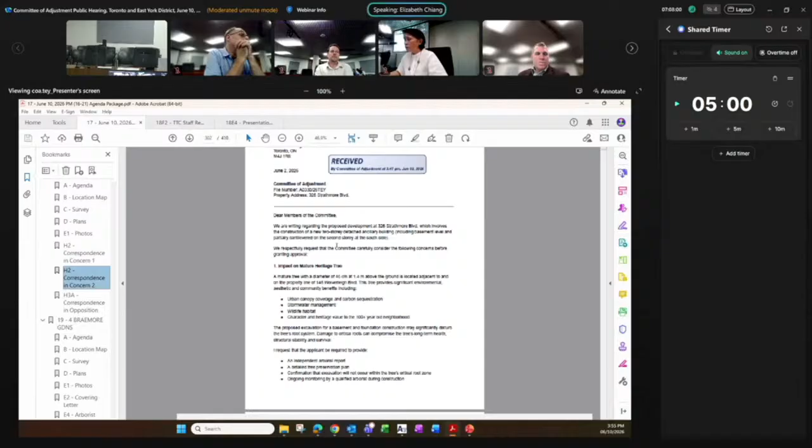Thank you, good afternoon, and thank you for the opportunity to speak. We are concerned about the proposed development at 326 Strathmore Boulevard because of its potential impact on a mature tree located on the 145 Wolverleigh Boulevard property, which is adjacent to the proposed development. This tree, with a diameter of 46 centimeters, is an important part of the community and contributes to the neighborhood's character. It provides environmental benefits and has likely been part of the community for several decades.

The proposed basement excavation and foundation work may damage the tree's root system, affecting its long-term health and stability. Before any approval is granted, I believe an independent arborist assessment and a detailed tree protection plan should be required.

We're also concerned about the setback, size, and location of the proposed two-story structure. Its proximity to neighboring properties, combined with the second-story windows, will result in significant privacy impacts as it will look over into our backyard seating area, increased shadowing, and a loss of open space between the homes.

These effects would alter the character of the existing residential environment and diminish the enjoyment of the neighboring properties, including ours. While I support reasonable development in the neighborhood, I respectfully ask the committee to carefully consider the long-term impacts of this proposal and ensure that adequate protections are in place for both the mature tree and the surrounding residents before making a decision. Thank you for your consideration.

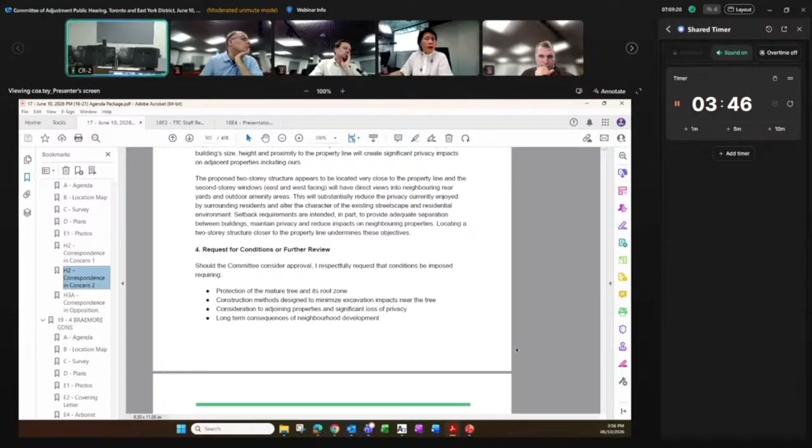Okay, any question to this speaker, please? No. Thank you. So we can go back to the first one.

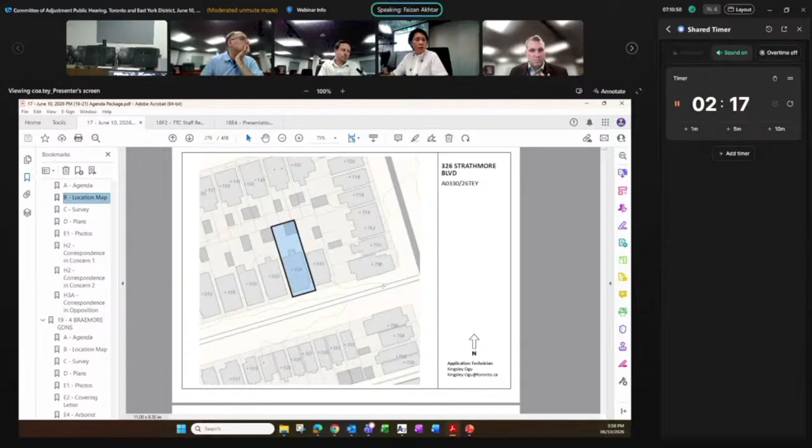So we're okay to engage an arborist there, and the committee of adjustment can place a condition on the approval that we'll get clearance from forestry, because I think that's one thing she is requesting, and I think the committee has put in conditions like that before as well. So we're okay with getting clearance from forestry.

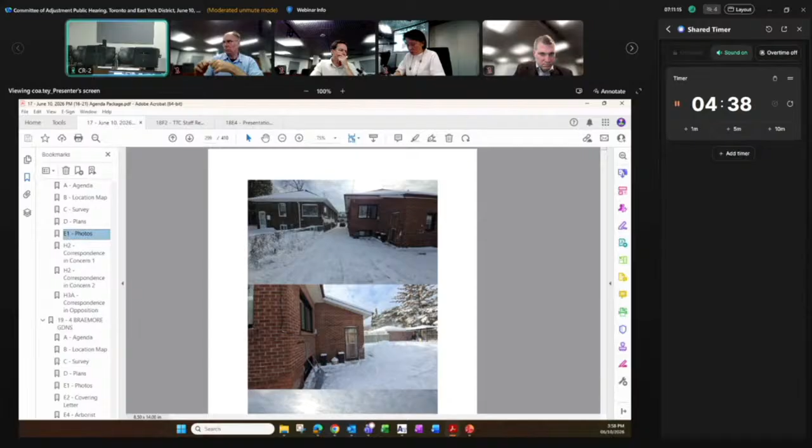Yeah, so that will be forestry condition one. Two is it? Okay. Would you be willing to have a condition that you get an arborist report? Yes, sure, that's fine. I mean, the forestry will require an arborist report anyway.

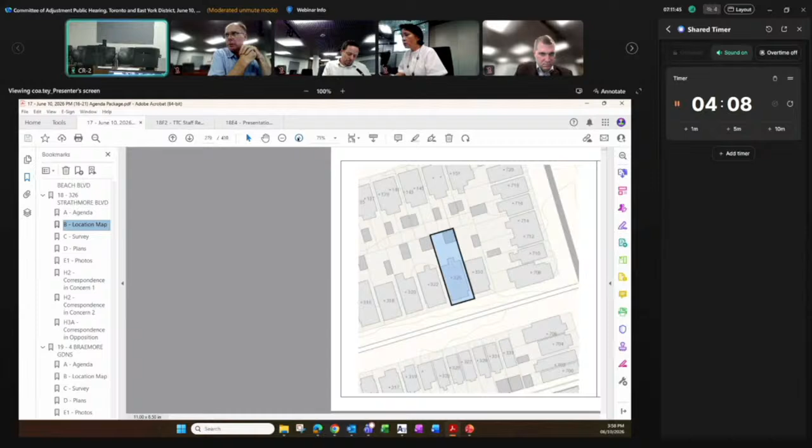Yeah, exactly, so I think that would be helpful and alleviate the concerns of the neighbors. Do you have anything more? Can I ask some further questions? We are ready to make a... that's a question, oh yeah, question please. Go ahead.

My other question is in terms of privacy. You do have a lot of windows kind of overlooking the neighbor yards. I'm looking at your plan, and you have some good size windows facing the main house on the second floor, which should provide plenty of light.

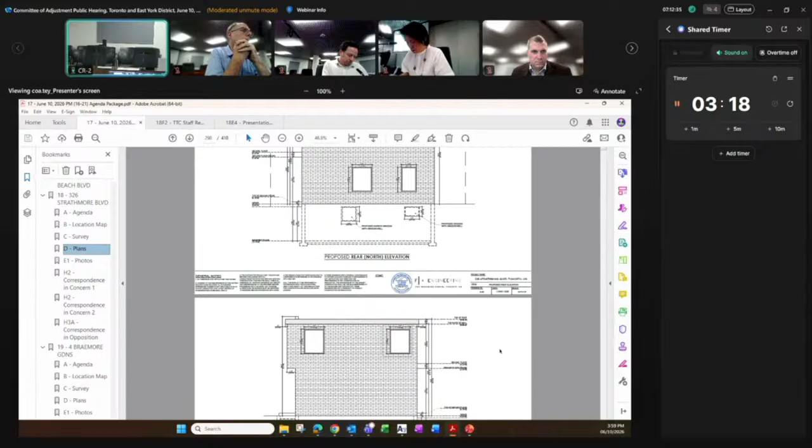I'm wondering if you'd be willing to have a condition that the windows on the east and west sides that overlook the neighbors would be frosted. Would that be okay? Yeah, that's fine. Frosted glass, because I think that would help alleviate the concerns of the neighbors as well. Perfect, that's perfectly fine. Okay, great.

Thank you very much. What floors are those windows on? On the second floor, on the east and west side. Okay, the second floor. All right.

Thank you, Madam Chair. Quick question: I noticed there are actually 3 levels to the proposed garden suite, correct? Yeah, the basement, main, and second. And why would a basement be included? They want it mostly for storage and recreation purposes. They have teenage kids, so essentially the garden home will be housing the teenagers, right?

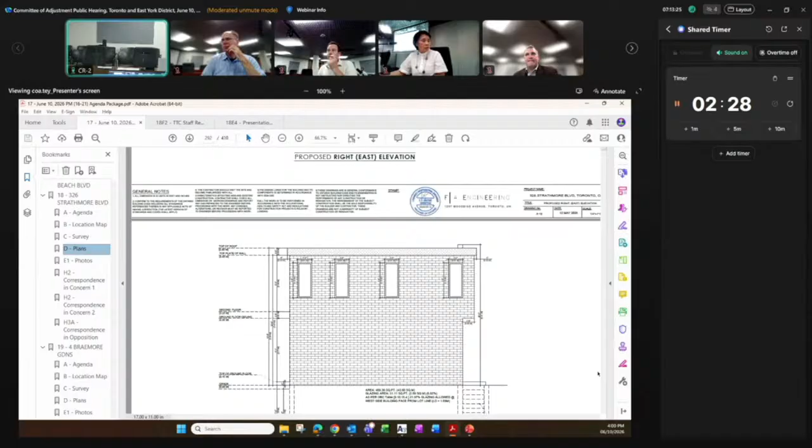Oh, so that was my next question. This is for multi-generational purposes, in other words. Yes, correct. Okay, so it's not going to be rented out. It's not going to be marketed at this point. Not at this point. Okay.

So you understand that the 2 variances you're requesting are related to the separation distance, which then triggers a variance for height as well. Correct. Why were you not able to satisfy the separation distance of 7.5 meters when you have a 2-story garden suite? That's the minimum separation distance, right?

The only way we would have been able to satisfy it is by demolishing that enclosed walkout. And like I mentioned, we've consulted with the homeowners, and they want to maintain the walls around that walkout for weatherproofing in wintertime. Apart from that, we are over the 7.5 limit.

If the site plan can be brought up again, we're around 8 meters for the separation between the main wall and the garden home. It's a fairly large property lot itself. And in terms of the garden unit, we are within the required 60 square meter footprint, which would be sufficient to house their teenagers until they grow out of it.

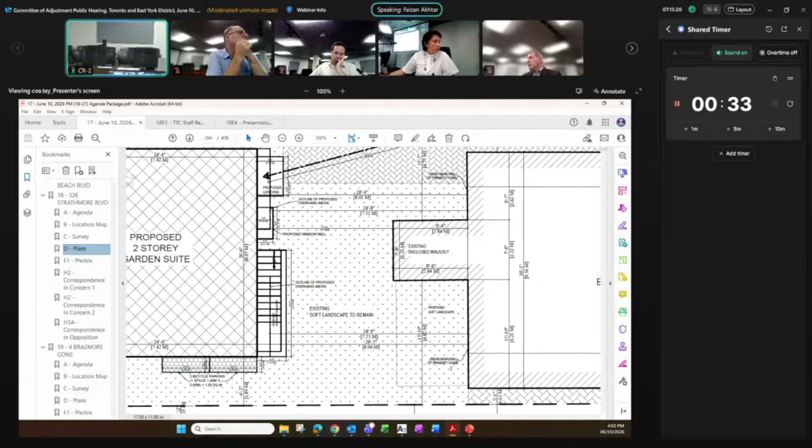I was out there, I saw the property, I noticed there's a one-story garage in the rear, which is not a small garage. Do you know that the city recently undertook a review of garden suites, and for the one-story garden suite they reduced the separation distance from 5 meters to 4 meters, but they didn't do that for the two-story?

That was done on purpose. They didn't want to touch that because it's a minimum 7.5 meters, which the city sees as an area for consolidated open space with the potential for protecting trees, planting trees, et cetera.

I have a bit of a concern. I understand that the separation distance relates to that walkout, but that walkout is a one-story walkout, right? Yeah, it's a single story walkout, just enclosed walls around there. Also, one more thing I wanted to point out is that we are maintaining the soft landscaping requirements. The variance doesn't relate to the soft landscaping, which we worked hard towards maintaining.

All right, thank you. Okay, please. Just to address any concerns, would you be willing to, if we tied the approval to the site plan, just so that we're establishing it's really just that walkout we're making an exception for if we do approve? Of course, yeah, that's fine.

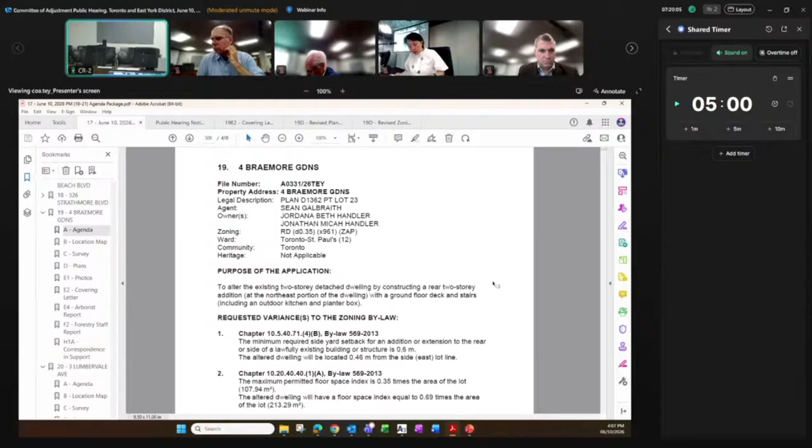We received a survey, site plan, floor plan elevations, 3 photographs, and cover letter, and an arborist report from the agent. We also received comment from Urban Forestry and correspondence in support from number 2 Braemore Gardens. That's all we have received, and we're ready for the agent or applicant.

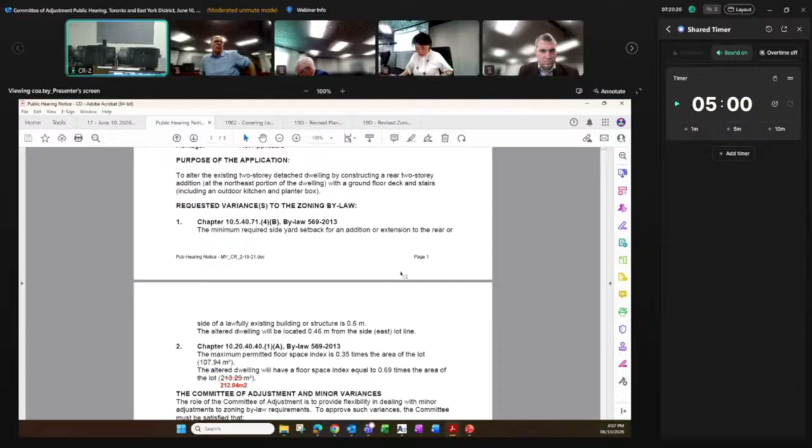Through you, Madam Chair, we have the agent online and no speakers for this item. Good afternoon, Sean Galbraith, planner here on behalf of the application, 18 King Street East, Suite 1400, Toronto.

It seems that you do not have any oppositions. What is on the screen? Is that a revision? So in discussions with the immediate neighbor to the east, there was originally a gentleman's agreement to reduce the depth of the second floor by 2 feet.

This was done a bit late in the process, and so we weren't sure if we were going to get a revised zoning notice in time. We just got it this afternoon, and so what's before you is the redlined public notice.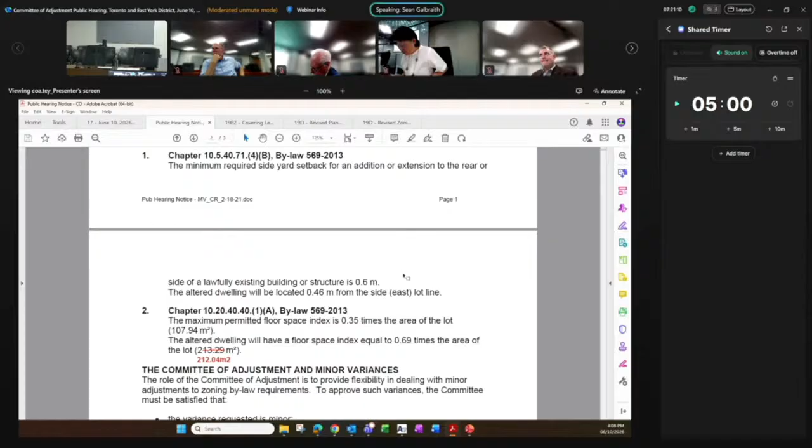The actual proposed FSI doesn't change. The amount of difference was very small, essentially within the rounding error. But the square footage changes a little bit. So in order for you to have the correct number in front of you...

It's still 0.69 times, that's still the same, 0.69. That's all we know. And there's a corresponding set of drawings that was also submitted if you wanted to see what that looked like. The change would only be on the second floor drawing. The footprint doesn't change.

At the far left side, you can see there's a 2 foot setback. Just a little bit, you can see the dimension. There it is, you can see that 2 foot dimension. So that was pulled back. The second floor was pulled back 2 feet, and the neighbor was appreciative of that change.

I'm just confused. You pull back 2 feet for the full length, right? How come it will not reduce the GFA, the size? It's only 0.61 deep, and it's only half the width of the building. So in square footage terms, it's a small amount over the area of the property, and so it doesn't actually change the FSI.

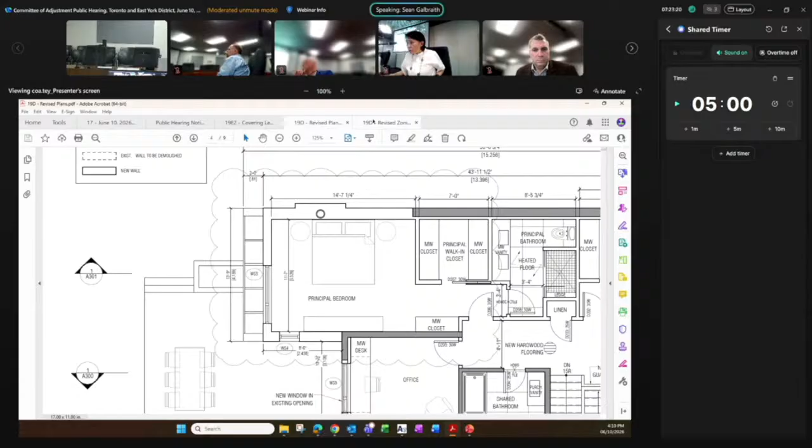I thought that it's good, I mean it's reduced, but we provided the committee with a copy of the revised zoning notice. Okay, so this has been confirmed by the zoning examiner. Oh okay, that's what they determined.

That's the size, all right. Okay, because I trust you, but I thought that it's surprising that it will not change the number. In any event, if we're off by a little bit, that step back is going to be provided in agreement with the neighbors.

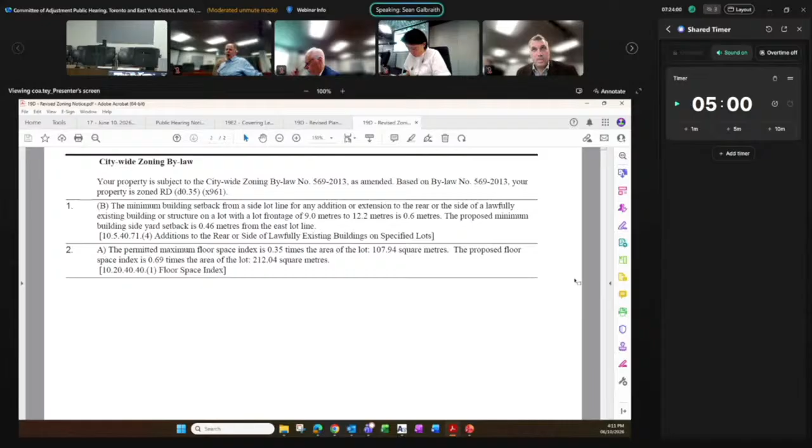And also we saw the urban forestry condition request, and we have no concerns with that, we expected it. So in that case, if we're going to make a motion, maybe we can tie it to the second floor plan to show the pullback, right? So we do not need a presentation, more questions, please. No, we do not have any more questions for you.

We are ready for committee discussion. Yeah, for the discussion, please.

Thank you, Madam Chair. This is a modest redevelopment and renovation of an existing two-story detached house on a unique lot in a cul-de-sac context. I think in reality, the FSI increase is actually not that great.

I believe the applicant has provided previous Committee of Adjustment approvals within the neighborhood, and these fall within that. There are no variances for building length, depth, or soft landscaping.

Understanding that there's a gentleman's agreement now in place regarding the second floor, I'm prepared to move a motion to support this application as amended and grant the two variances, subject to tying this to the second floor elevations, and a condition on urban forestry condition number 2.

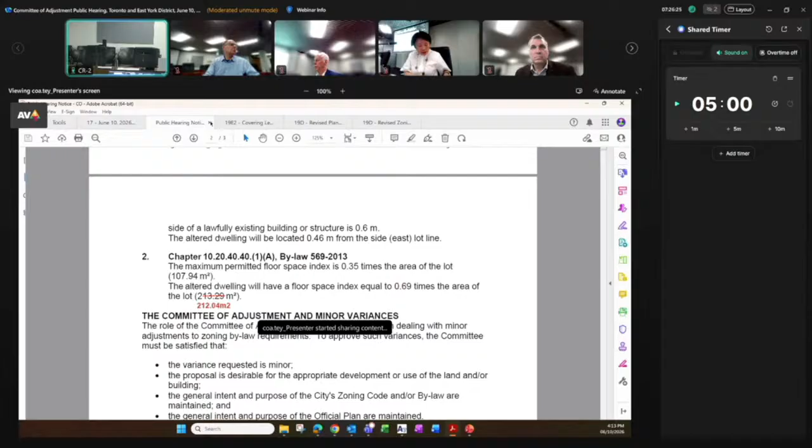Okay, so our next item is item 20, 3 Lumbervale Avenue. This is to alter the existing 2-story semi-detached dwelling by constructing a rear second-story addition above the existing first-floor addition, and a rear basement walkout. We have received survey, site plan, floor plan elevation, two photographs, and a cover letter from the agent. We also received correspondence in support from 1298 College Street. We haven't received any opposition.

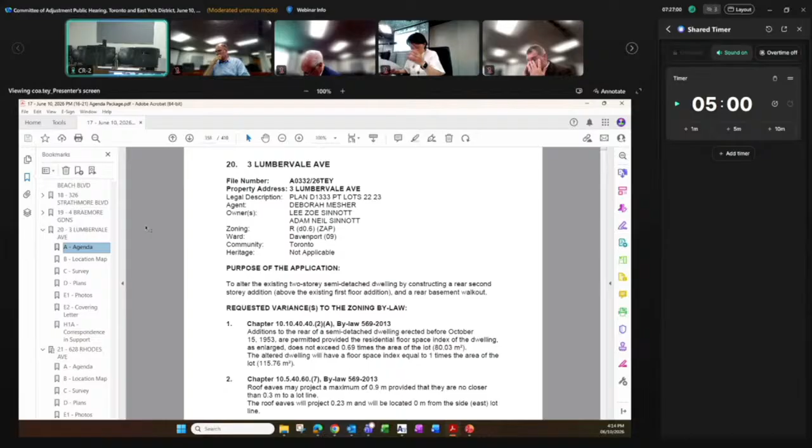Madam Chair, we have the agent online and no speakers for this item. Okay.

Do we have him connected?

Hello, can you hear me? Oh yeah, we can hear you now. Okay, excellent. Yes, I'm the agent, Deborah Mesher, and my address is 198 Melita Avenue, Toronto.

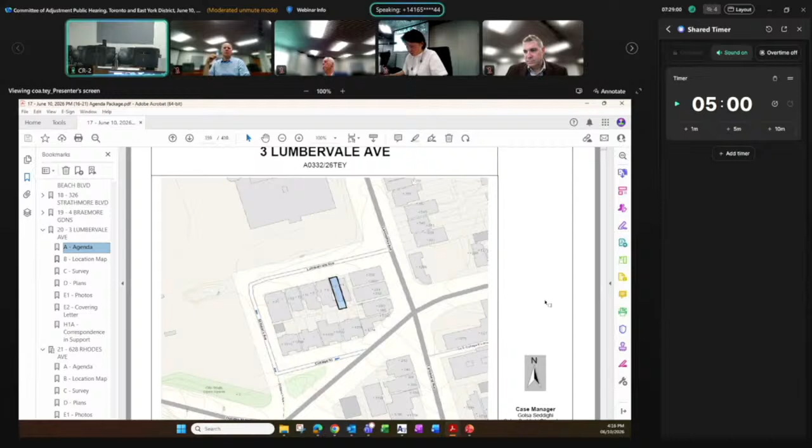Just to clarify, the existing FSI is actually 0.93 and we're asking for 1.0. So it's not jumping from 0.69 to 1.0. I just wanted to say that.

Can you repeat that? Is that variance number 1, the density variance? I just wanted to state that the existing FSI is already 0.93. Oh, I see, okay, so you're just making a very small increase from the existing. That's what you mean, right? Yeah, from the existing, I mean.

Thank you. Any other questions? No, we don't have any more questions. We're ready. Please, Peter.

Thanks, Chair. I'm happy to take this because I think it's a very minor application. There's a slight increase in GFA, and it's a small addition over an existing one-story. There's no change in footprint, and it's on a pretty densely packed lot. This doesn't go nearly as deep as many other buildings on that lot. I can see no negative impacts to approving this, so I move approval without condition.

Dino seconds, we have a second, and all in favor with no conditions, all in favor. It's approved unanimously, thank you.

The last item is 21, 628 Rhodes Avenue, to alter the existing two-story detached dwelling by replacing the existing rear deck with a new two-story addition, partially cantilevered, with a first floor porch and stair. We received a survey, site plan, floor plan elevation, five photographs, and also a comparable approval from the agent.

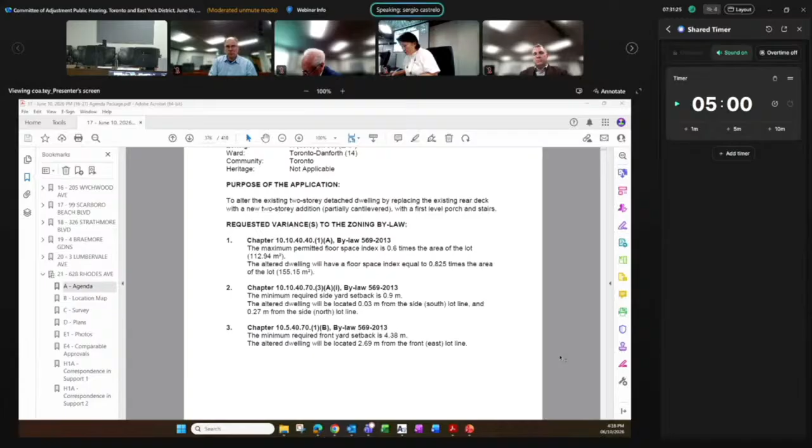Hello, Sergio Castrelo, 630 Rhodes Avenue. We just want to know whether you are in opposition or you just have a concern. I have a concern. I'm in favor.

I just wanted to make sure the side yard is clear. Right now he has access to the backyard through the hallway between 630 Rhodes and 628. Once this addition is done, he won't have access to his backyard because he would have to go into 630's backyard to access it. That's it, I just wanted that clarified. Yeah, we have the agent to provide us with his response on this.

Okay, thank you. Now let's have the agent, or the applicant if they have any response. Brad, you've been unmuted. Hi there, can you hear me? Yes, we can hear you. Great, good afternoon, Madam Chair, members of the panel. I'm happy to give a little talk about the presentation in general, or address the question.

That's the one thing I want to check with the panel, whether they require a full presentation or just to address the issue the previous speaker raised about access to the backyard. I'm not really too sure about the context. 630 being to the north of the property, there's not really much access between those two houses as it exists. 628 accesses the rear yard from the south side, between 626 and 628.

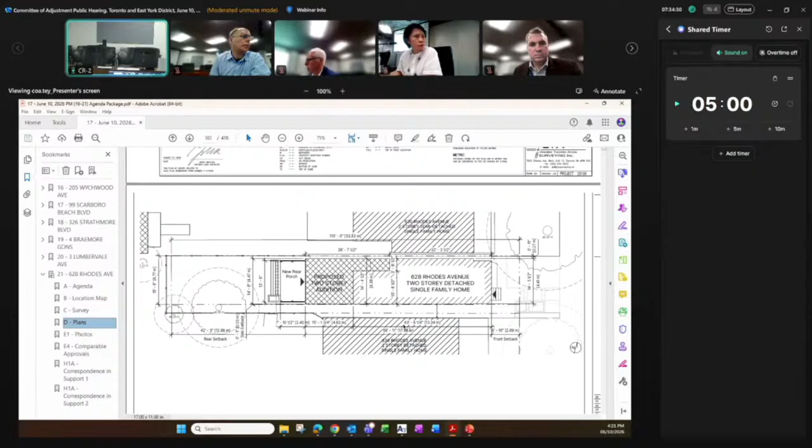So on the south side, even though you're on the property line, you benefit from an easement that allows you to use that extra space between you and the other building. Okay, I just wanted to clarify that. I think that was important to clarify given the concern of the neighbor. Okay, thanks a lot.

It seems what is on the screen is very different from the survey. The survey seemed to have the south side a lot closer to the property line, but it seemed different. That's why I was confused.

I think what they're saying is that although the south side is almost directly on the property line, there's some kind of easement with the neighbor on the south side. So the neighbor has quite a large setback and apparently has that easement to use. No, what I'm saying is I understand that, but this drawing and the survey show maybe the true dimension, while the drawings we just saw seem to imply there's extra space. It's different. You're correct, I was confused by that. This is based on the survey, right?

Okay, any other questions, please? For committee? Yes, please. We are committee. We have no question.

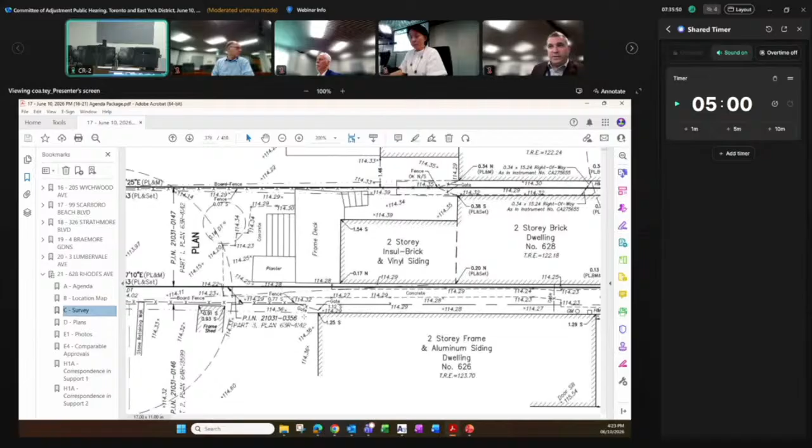I think this is the new norm for Rhodes. A lot of those small houses are being expanded. I find the variances to be quite minor, and I think the development's appropriate. I know Rhodes Ave got popular a few years ago, people started referring to it as Rhodesdale. So I don't think there's any condition, so I'll move forward with proposing approval of the three variances. That's good to hear.

We have a second, please. No second needed. All in favor, with no conditions? All in favor? It's approved unanimously.